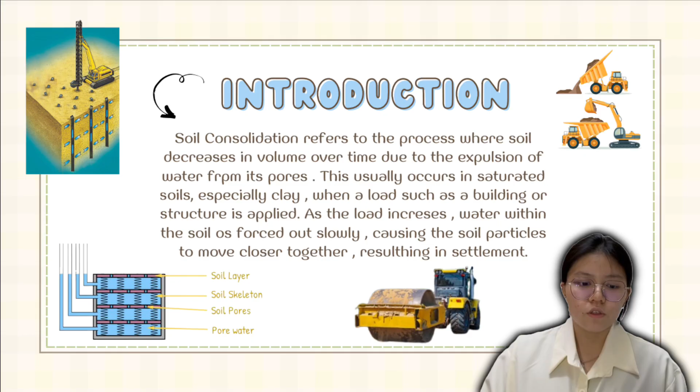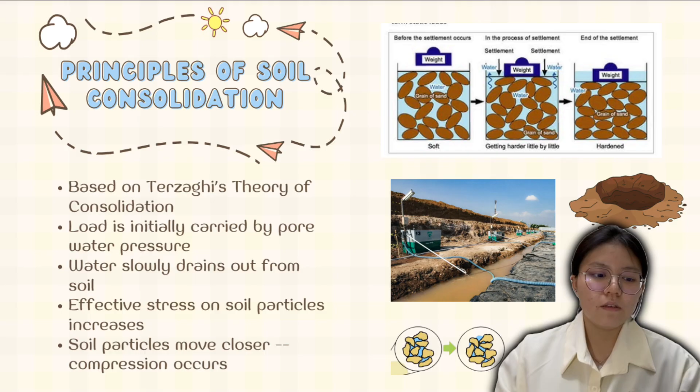So now, I will explain the principle of soil consolidation. The principle of soil consolidation is based on Terzaghi's theory of consolidation. According to this theory, when a load is applied to soil, it is initially supported by pore water pressure. Over time, the water drains out and the load is gradually transferred to the soil particles. This increases the effective stress and causes the soil to compress.

And then there is the concept of soil consolidation. The concept of soil consolidation explains how this process happens over time. It is not immediate but occurs gradually depending on the soil type and drainage condition. In engineering, this concept is very important because it helps predict how much and how long the ground will settle, ensuring safe and stable construction.

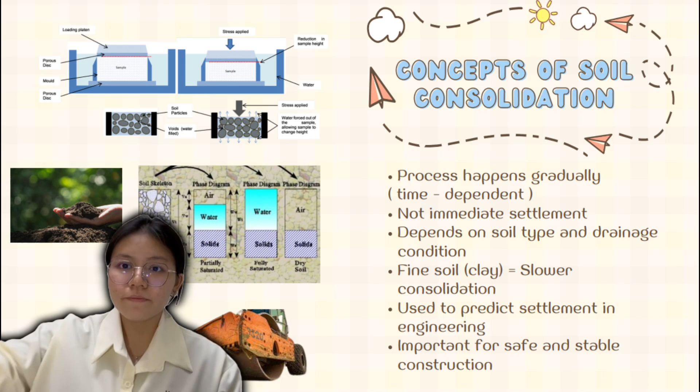So today, I will explain soil consolidation in construction. The soil consolidation process begins when a load such as a building is applied to the ground. This increases the pore water pressure inside the soil. So that means when we put the building on the ground, the water inside the soil is pressurized. Then the water starts to flow out slowly through the soil. Next, the soil particles rearrange themselves into a denser structure. Finally, settlement happens gradually over time.

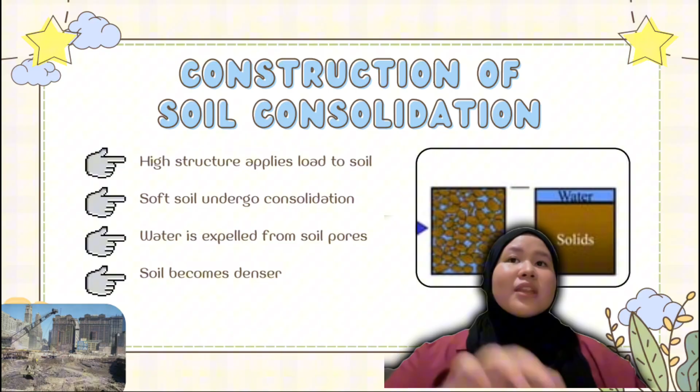This process may take a long time, especially in clay soil. This is because clay soil has extremely low permeability, making it difficult for water to escape from its tiny pores. When subjected to a load, clay soil usually takes months or years to dissipate. This means it is very difficult for the water inside the soil to escape, but it can.

So let me give an example of construction using soil consolidation in Malaysia. The example is the Petronas Twin Towers in Kuala Lumpur. The towers were built on a site with limestone and soft soil, which created a risk of uneven settlement. So engineers used bored piles and a raft foundation to transfer the load to stronger ground. These methods help to control settlement and ensure the stability of the structure. This shows the importance of considering consolidation in a major construction project.

So the next slide, this diagram shows the foundation system of the Petronas Twin Towers. At the top, we can see the building structure, which transfers load down to the foundation. Just below the structure is the raft foundation, which helps to distribute the load evenly. Below the raft, there are deep bored piles. These piles extend very deep into the ground, like 60 to 100 meters. Their function is to transfer the load from the building to a stronger layer underground.

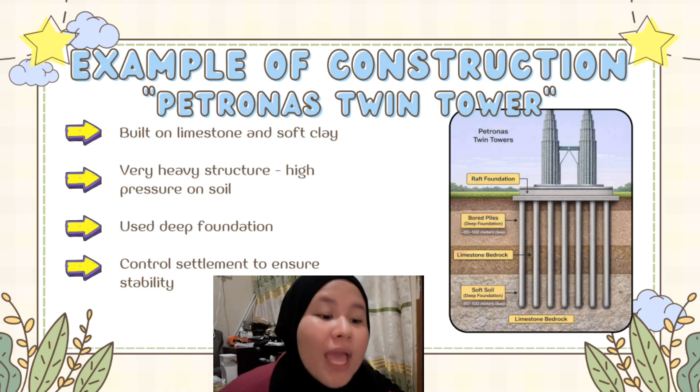So in this case, the piles reach the limestone bedrock, which is much stronger and more stable compared to the soft soil above. The soft soil layer in the middle is compressible and can undergo consolidation. If the building relied only on this soft soil, it could lead to excessive settlement. Therefore, the use of deep piles helps to reduce the effect of soil consolidation and ensure the stability of the structure.

Okay, so this picture shows the process called consolidation before the construction starts. So the first picture is when the building is constructed on a soft soil, the weight of the structure applies a lot on the ground. So the raft foundation helps to distribute the load evenly.

So picture 2 is the soft soil beneath containing water. It is pressured under the applied load. Water starts to drain slowly and soil particles rearrange themselves. So picture 2 is the start of the consolidation in this construction.

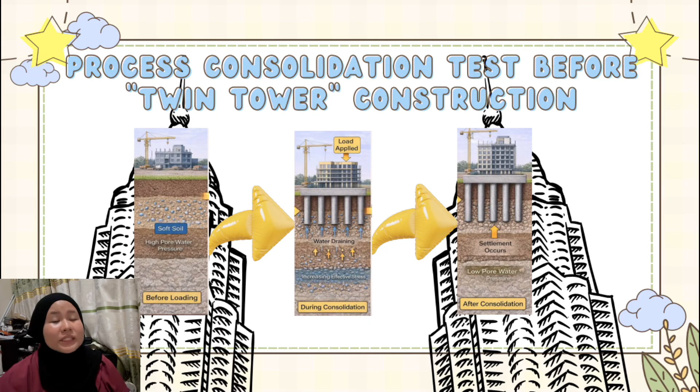And picture 3 is the bored piles used to transfer the load deeper into the limestone bedrock, reducing settlement and ensuring the stability of the structure. Just like that. So I will pass to my friend.

I would like to present about the terms used. The first one is volume compressibility, MV. Okay, in the construction of high-rise buildings such as the Petronas Twin Towers, the structural load applied to the ground is extremely large. Therefore, the soil beneath the foundation must be able to withstand high stress without excessive compression.

The parameter volume compressibility MV is important because it indicates how easily the soil volume decreases when the effective stress increases. A high MV value means the soil is soft and highly compressible, which may lead to large settlement. Okay, for the formula to find the volume compressibility, we use M sub V, which is delta e divided by the product of 1 plus e naught and delta sigma prime.

Okay, for a calculation example, if the change in the void ratio is delta e equal to 0.12, the initial void ratio is e equal to 0.90, and the increase in effective stress is delta sigma equal to 100 kN per meter square, the calculated MV value is 0.00063 meter square per kilonewton.

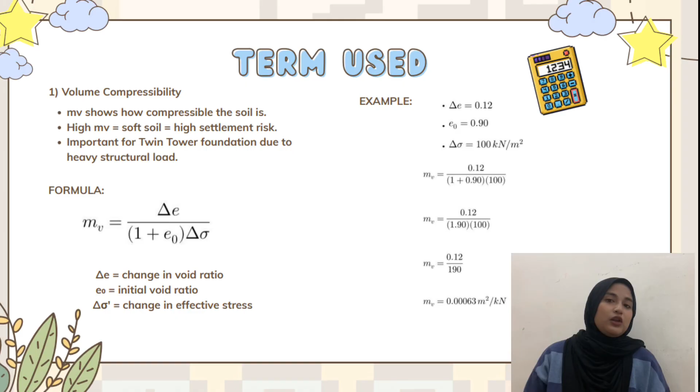This indicates the soil has a relatively high compressibility, which can cause significant settlement under the heavy load of a structure such as the Twin Towers.

Next, I would like to present about the coefficient of consolidation CV. In a large construction project like the Petronas Twin Towers, settlement does not occur instantly, especially if the soil consists of soft clay. This is because clay has low permeability, so water escapes slowly.

The coefficient of consolidation CV is used to determine the speed of consolidation, which represents how fast excess pore water pressure dissipates. A small CV value indicates that consolidation will take a long period of time.

So, the formula for the coefficient of consolidation: C sub V is calculated by dividing the permeability K by the product of the volume compressibility M sub V and the unit weight of water gamma W. And for instance, if the soil permeability is K equal to 1.0 times 10 to the negative 9 meter per second, MV is 0.00063 meter square per kilonewton, and the unit weight of water is 9.81 kilonewton per meter cube.

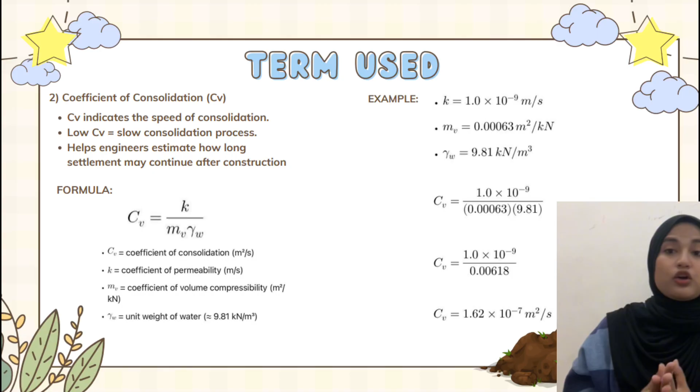Okay, next is degree of consolidation. The degree of consolidation U is used to determine the percentage of consolidation complete at a certain time in a major construction project such as the Petronas Twin Towers. Monitoring U is important to ensure that the soil has achieved sufficient settlement before continuing to future construction stages, as incomplete consolidation may cause long-term

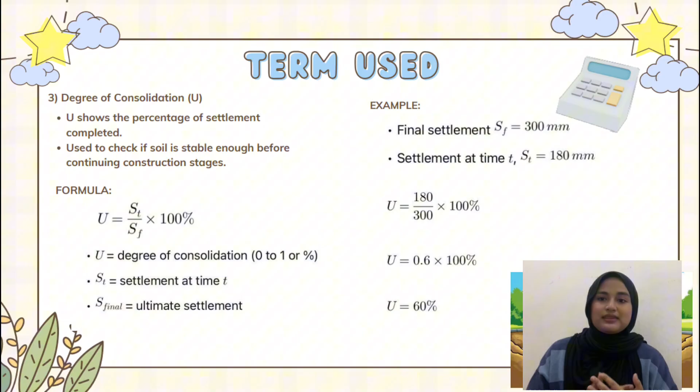This means that only 60% of the total settlement has occurred, right? And the remaining 40% settlement may still happen in the future.

Okay, next is time factor TV. The time factor TV is a dimensionless value used to relate the time required for consolidation with the coefficient of consolidation and the drainage path. In high-rise constructions such as the Petronas Twin Tower, TV helps engineers estimate how long it will take for the soil to reach a specific degree of consolidation. This information is important to decide whether soil improvement methods such as preloading or vertical drains are required.

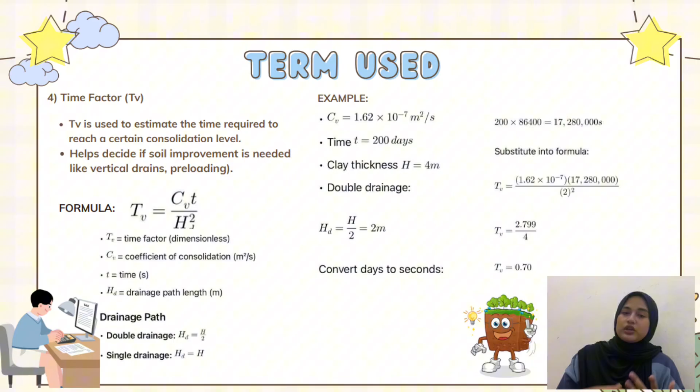Okay, next is rate of settlement. The rate of settlement describes how quickly the ground surface settles over a period of time. In the construction of tall structures such as the Petronas Twin Tower, monitoring the rate of settlement is essential because excessive settlement speed can lead to foundation instability, structural cracking, or differential settlement between building sections.

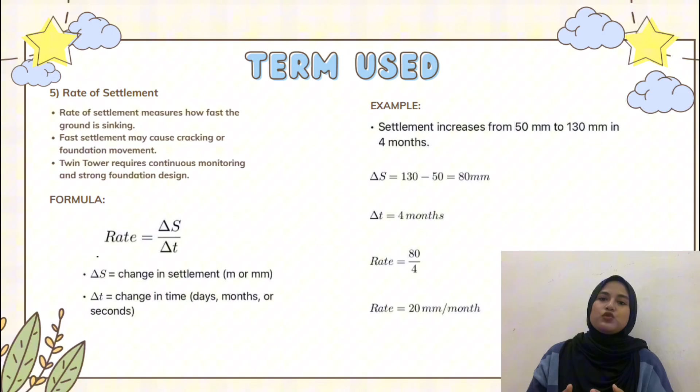Okay, for the calculation example, if the settlement increases from 50 mm to 130 mm within 4 months, the rate of settlement is calculated as 20 mm per month. This indicates a relatively high settlement rate. An engineer must ensure that the settlement remains within safe limits by using appropriate foundation systems such as pile foundation.